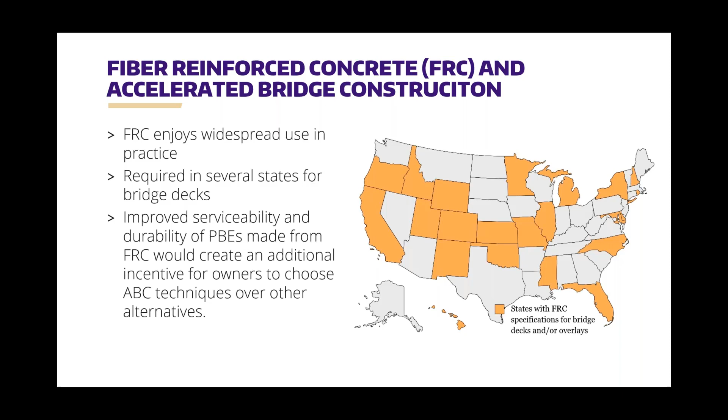So what are the benefits of macrosynthetic fibers? Obviously steel fibers are one option; the other option is macrosynthetic fibers. The advantage of using these macrosynthetic fibers is the improved durability and ductility of the concrete. Those fibers bridge between cracks and keep crack widths smaller, and that's what we know and why we use these fibers in practice.

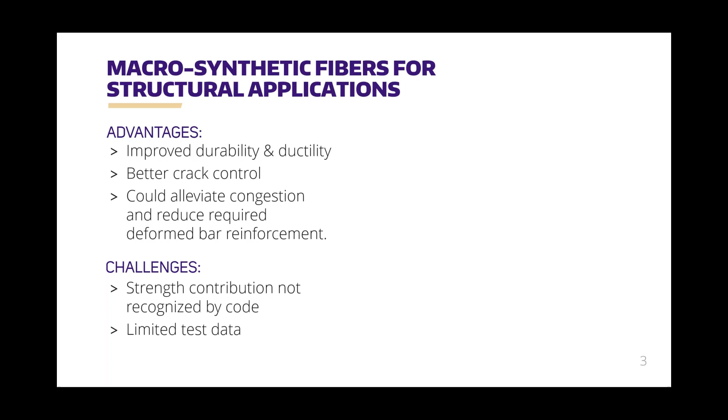What we're really exploring in this project is whether we could alleviate congestion and reduce the required amount of deformed bar reinforcement by using these fibers that are placed there for durability. Obviously they contribute to the strength somewhat, so could we use the strength of these fibers for structural applications? The challenge is that the strength contribution of these macrosynthetic fibers is not recognized by the code, and there's really limited test data out there to allow us to make recommendations.

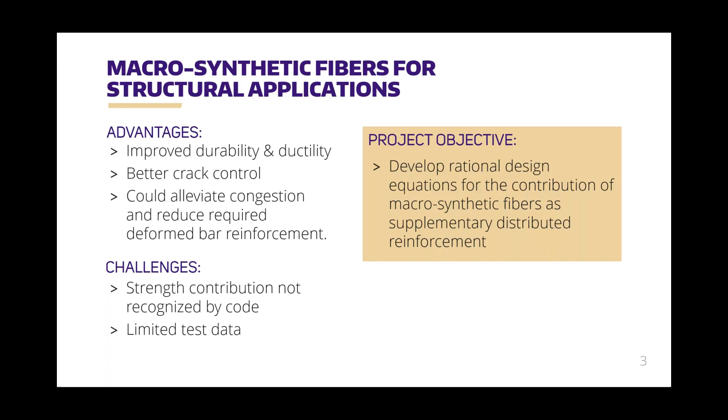So the project objective is to develop rational design equations for the combined use of macrosynthetic fibers as supplementary distributed reinforcement, in addition to conventional deformed bar reinforcement for shear.

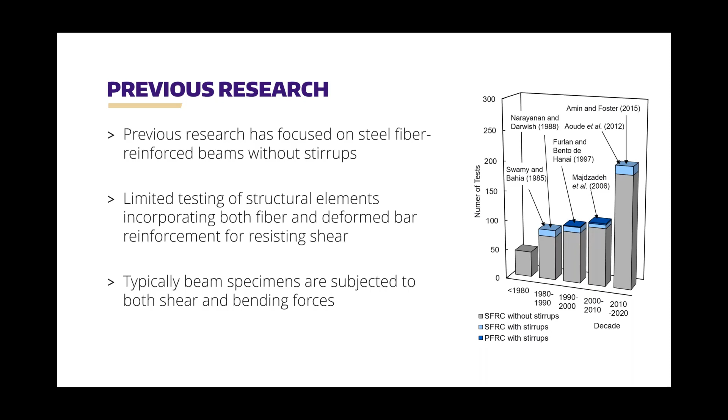Looking at what's out there in terms of research, previous research has really focused on steel fiber reinforced beams without stirrups. If you look at the bar chart, that's the last 40 years of research on fiber reinforced concrete, and you can see that for the most part everything is gray bars - steel fiber reinforced concrete without stirrups. There's really limited testing of structural elements that incorporate both fiber and deformed bar reinforcement - those are the blue bars - but even then those are typically steel fiber reinforced concrete. Almost all the data we have is looking at beams, so you have some combination of flexure and shear inherent to that test method.

I'm going to highlight one of the tests in that database - a test done on both synthetic fiber reinforced concrete and steel fiber reinforced concrete. It was an interesting study in that they tested beams without stirrups and fibers, some beams with fibers but no stirrups, some with stirrups but no fibers, and some with both stirrups and fibers. So they hit all the corners of the square.

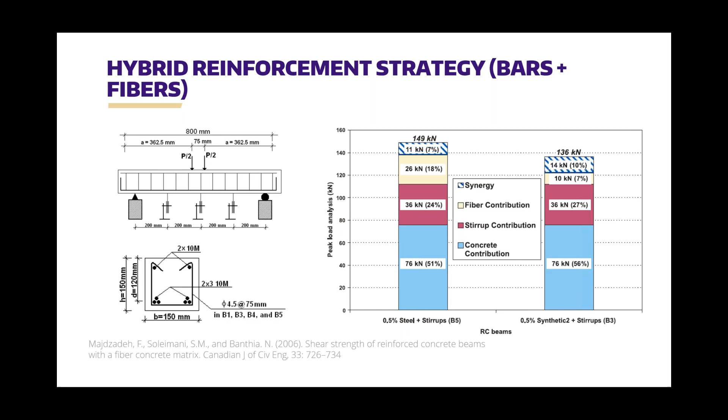What was interesting is that they could then look at the contribution from each of these different components. You can see we have some contribution from the concrete; if you add stirrups that contributes some as well; the fibers contribute a little bit as well. But there was this added benefit - what they're calling synergy in this picture - that added benefit when you had both the fibers and steel together. That's really what we're exploring in this project: can we quantify that synergy in a meaningful way?

So when we think about shear resistance of structural elements, we know there are contributions from a number of different sources. The question we have here is: should we add a contribution from those fibers?

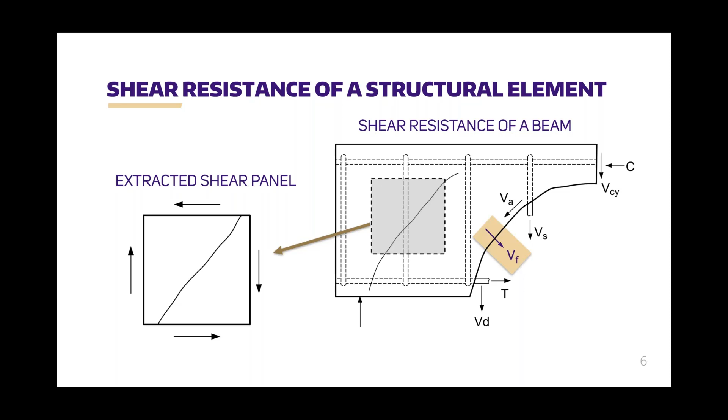Beam testing is one way to go about it. A more direct way to look at shear resistance would be to extract some shear panel from your element. To test shear panels, you need a specialized shear tester. Thankfully at the University of Washington, we have one of those, which makes us uniquely situated to look at this.

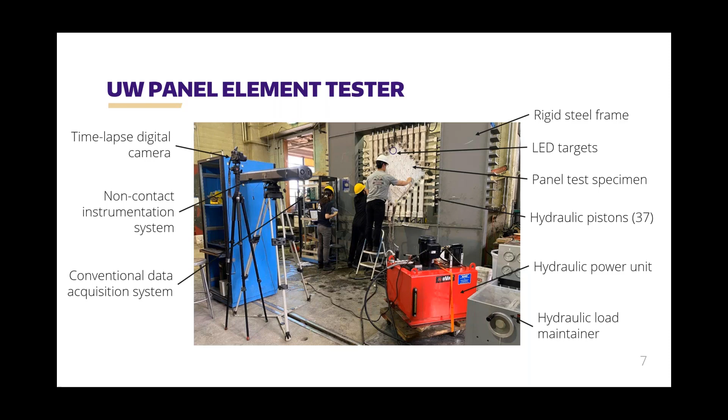Here you see the panel tester in our lab. You have a rigid steel frame, which is used to react all of the loads. You have your panel test specimen, the diamond-shaped specimen in the middle. We're applying an in-plane stress state using hydraulic actuators, controlled by a hydraulic load maintainer and hydraulic power unit. We're applying a state of known stress, and we can apply any state of in-plane stresses in terms of pure shear or shear plus axial, shear plus tension. Then we're measuring the strains using a non-contact instrumentation system, which keeps track of the location of LED targets applied to the front surface.

The research program we had in place here, the first part of it was to develop a database of tests of macrosynthetic fiber reinforced concrete. You saw that bar chart at the front of the presentation. That phase of the project is complete.

Then we were going to perform experimental tests to investigate the combined use of deformed bar reinforcement and macrosynthetic fibers in concrete, to resist those shear forces. I am happy to report that as of this presentation, we're now finished with that, so I get to finally present some results of that test campaign.

The test series, we ended up testing 12 panels in all. They had 3 volume fractions of fibers: panels without any fibers, then panels with 0.26% and 0.52%. Those percentages seem a little odd, but it's really 4 pounds per cubic yard and 8 pounds per cubic yard. 8 pounds per cubic yard is actually the maximum addition rate that the fiber manufacturer recommends.

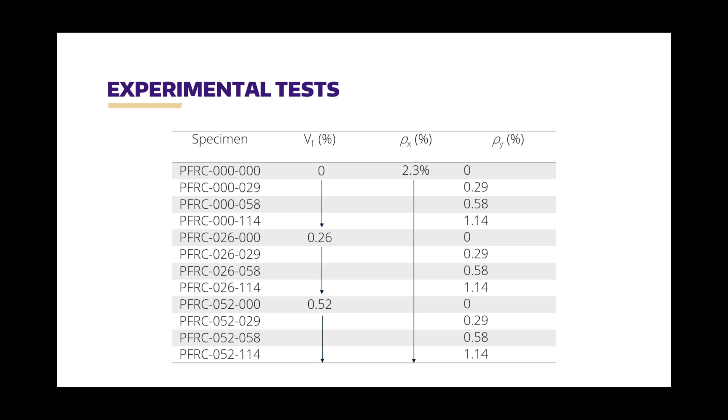In the longitudinal direction, all the panels had 2.3% steel, and in the transverse direction we had 4 different levels again, from no transverse reinforcement up to the maximum transverse reinforcement allowed for this specimen size.

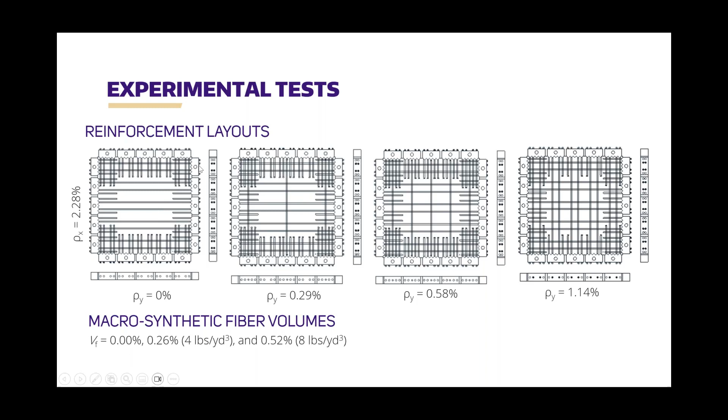Here's what that looks like in terms of the reinforcement layout. You can see in all cases the steel going left to right horizontally is the same in all sets of the panels, and really all we're varying is the reinforcement in the vertical direction. The specimens with 0.29% had 3 bars, with 0.58% had 5 bars, and with 1.14% had 10 bars crossing the test region, which is the portion in the middle of the panel, once you get past those headed bars that help anchor in these rigid blocks. Those rigid blocks allow us to attach it to the test machine and apply those shear forces.

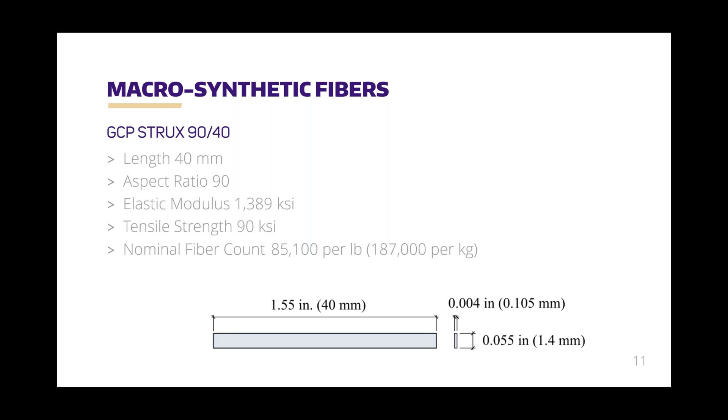The type of fibers we were using in this test series are GCP Strux 90/40. They have a long track record of use in both experimental testing and in practice, and because of that track record, they were useful for our purposes. They're 40 millimeters in length, have an effective aspect ratio of 90 - you can see the dimensions on the bottom. They're essentially a tape-like fiber with a high elastic modulus and tensile strength, which is why they were quite useful for this test.

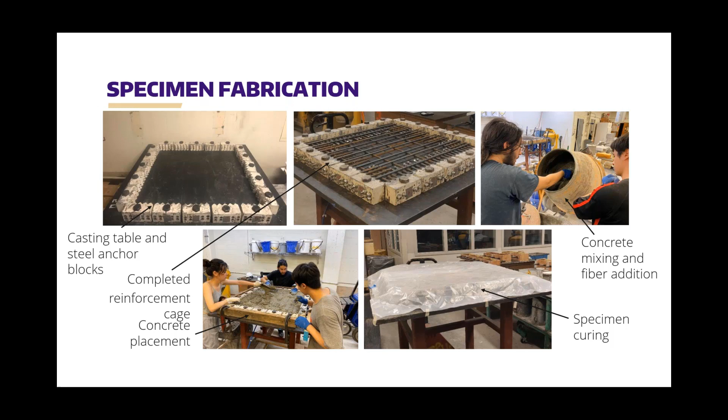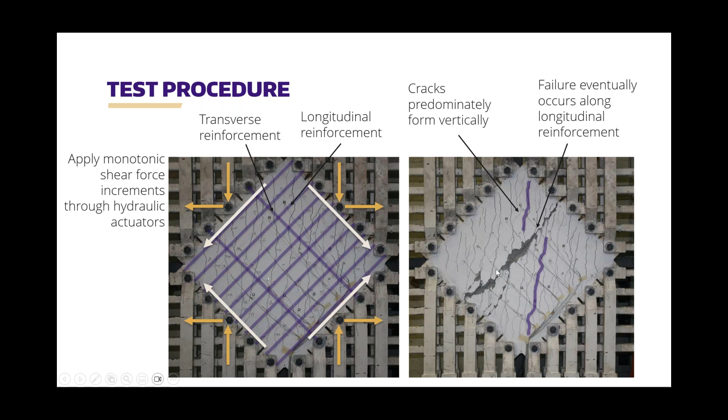Those cracks are in the direction of the principal tension, and then you eventually get failure along the longitudinal reinforcement. That's what you see in the big crack there, the final failure surface, which happens along that longitudinal reinforcement.

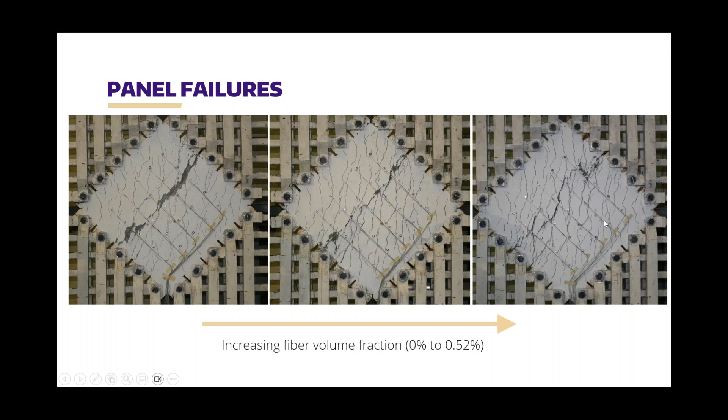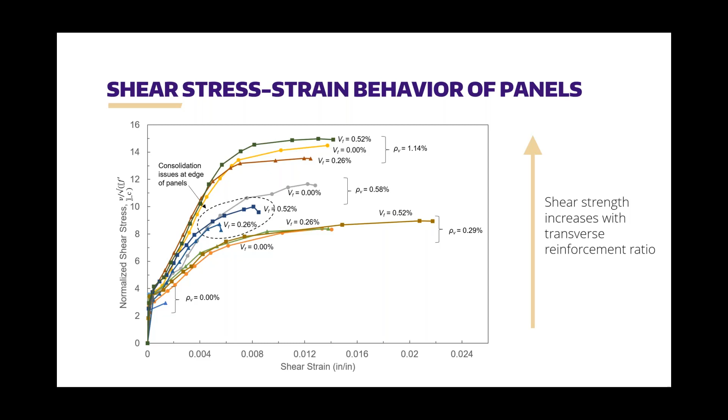So there certainly were some issues with this panel, and we think that's why we're seeing what we're seeing in that plot. We're seeing if we can retest these panels. It would be great to really see if that's what the cause was, because certainly it's showing a different trend than the other sets of tests.

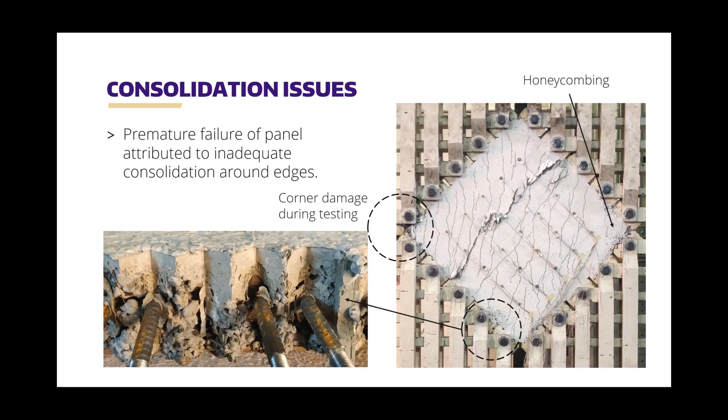Some of the things that you'd hope for in terms of the addition of fibers - you'd expect that the crack widths would decrease as you add fibers.

First I was going to show you average crack widths. Here's the average crack width as a function of both fiber volume fraction, the plot on the left, and as a function of transverse reinforcement ratio with the plot on the right. As you can see, in both cases, the average crack width decreases as the volume of fibers or the transverse reinforcement ratio increases. There's a few data points that look a little weird - those are those panels that had consolidation issues. But overall, the general trend is true. That makes sense, that's what we expect.

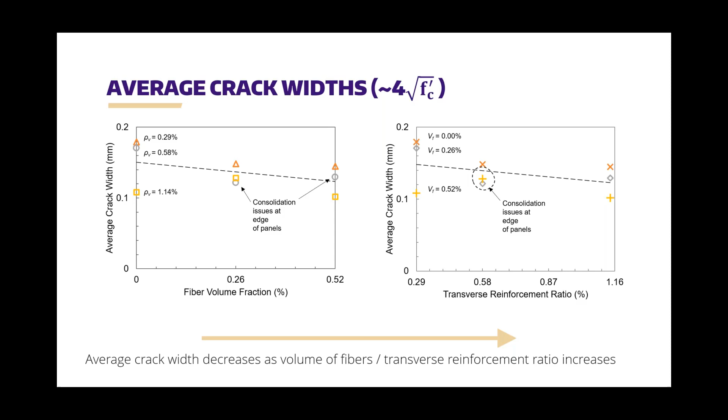Same thing's true of the maximum crack width. This is again at a stress level about 6 roots F prime C.

We're comparing 3 different volume fractions from 0% to 0.52%. The maximum crack width decreases as the volume of fibers increases. That's exactly what we hoped for, and that's what we saw as well. So that's good news there.

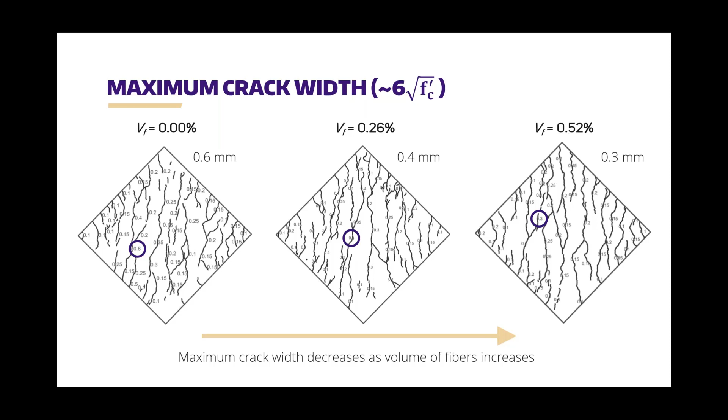We're still processing the data and digesting what we're seeing. But some preliminary observations are that macrosynthetic fibers are effective at decreasing both the maximum and average crack widths during shear loading, which is what we would expect and hope to see.

There appears to be some benefit of adding macrosynthetic fibers in terms of strength and deformability at the addition rates used in the study, and these were pretty low addition rates. 0.52% is not very high compared to other tests done at 1 and 2%. We're still digging into that and hoping to do some statistical analysis to show whether or not it's significant.

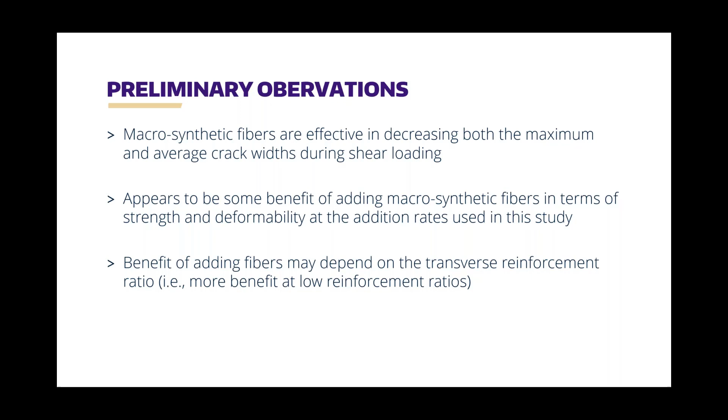The benefit of adding fibers may depend on the transverse reinforcement ratio. Looking at that plot more carefully, you might actually get more benefit at the lower reinforcement ratios than at the higher ones, which might make sense in terms of the behavior and mechanics involved.

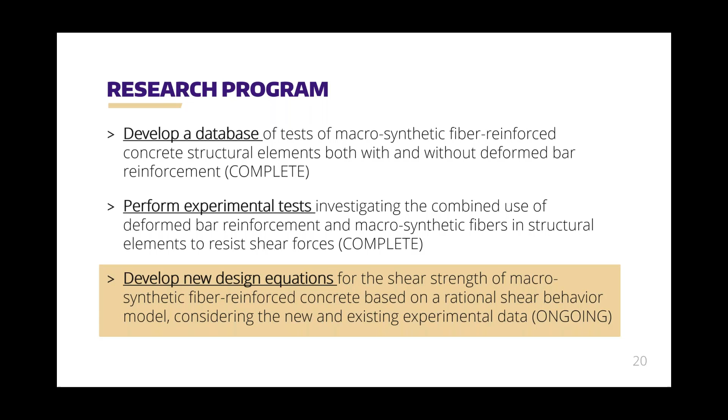The next phase was to develop new design equations for the shear strength of macrosynthetic fibers based on a rational shear behavior model, which is based on the modified compression field theory. It was developed using panel element tests and forms the basis for the shear codes in the AASHTO code, so it makes sense to go this way.

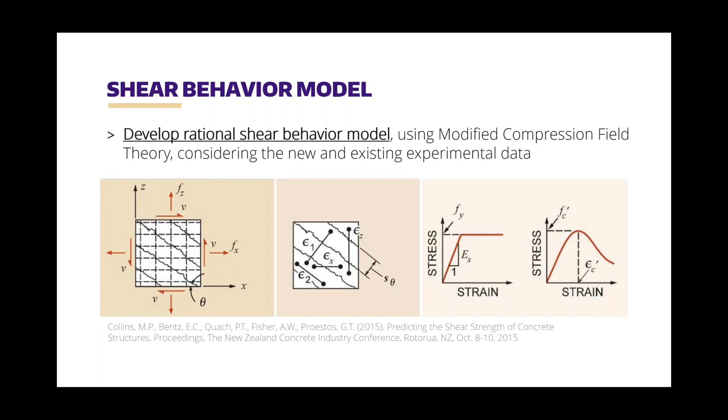Starting from the mechanics on the left, looking at principal strains in the panel in the middle, then converting those strains to stresses using constitutive relationships, which we can then calibrate to what we have in the test.

We have a student right now looking at this in both Membrane2000 and VecTor2, finite element programs both based on the modified compression field theory. His job is to calibrate the constitutive relationships and modeling approaches based on these tested panels, and he's making great strides so far.

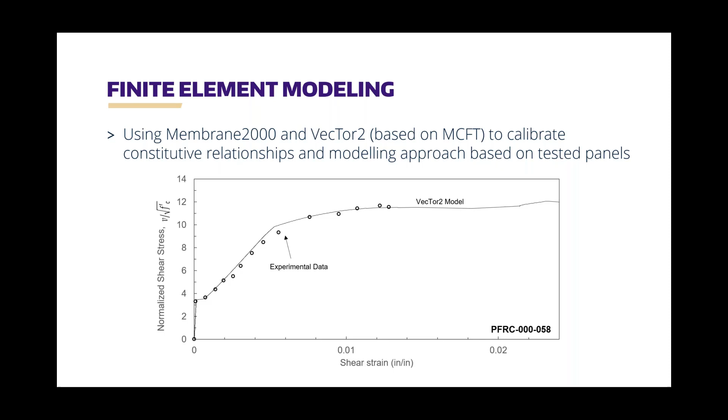This is one of our panels without fiber reinforcement, and you can see the VecTor2 model doing a great job at capturing that behavior. Of course, once you add fibers, you need to modify things, and that's what he's working on now.

The hope is that we can use the companion tests we've done. This is the ASTM C1609 beam. Excuse me, sorry, I'm a little under the weather today.

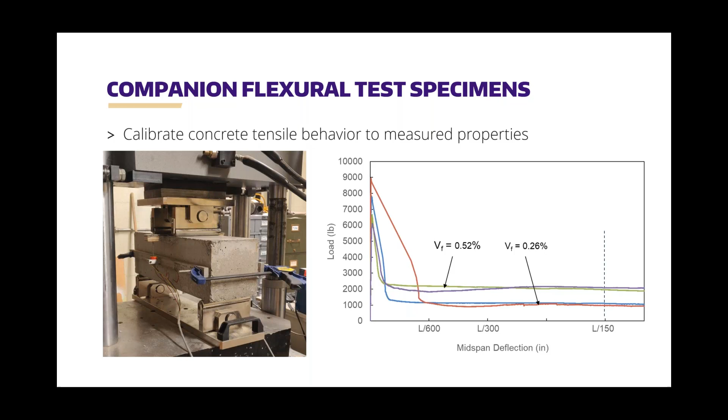We're hoping he can use these tests of these beams that show the flexural relationship here, so you can see the residual strength and the change in residual strength caused by the fibers.

We'll be using existing empirical relationships, and potentially some new recommendations, for structural members that contain both fiber and deformed bar reinforcement. The idea would be to have equations that include the contribution from macrosynthetic fibers on the shear strength of concrete elements.

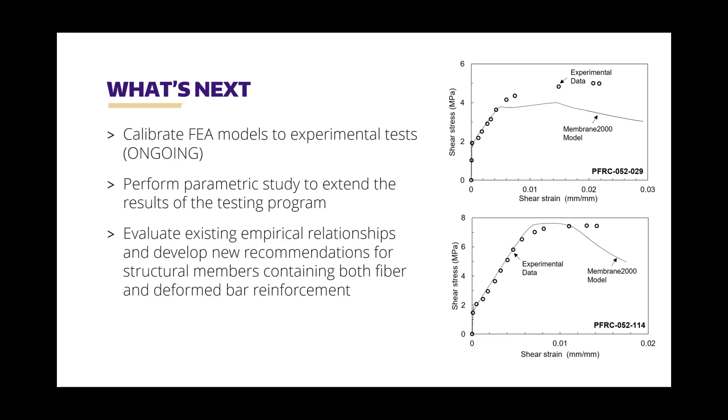With that, I'd like to say thank you very much for listening, and I'm happy to take any questions. I might have gone a little into my time there.

No, you did very good. So Dr. Townsend, thank you very much.

We don't have so much time for that question, but I want to make a comment on your shear testing apparatus. We had it in one of our seminars. It's really a great advantage to have that kind of setup.

Absolutely, yeah. We're very happy that Dr. Calvi came to UW and was able to bring that capability with him. Thank you very much.